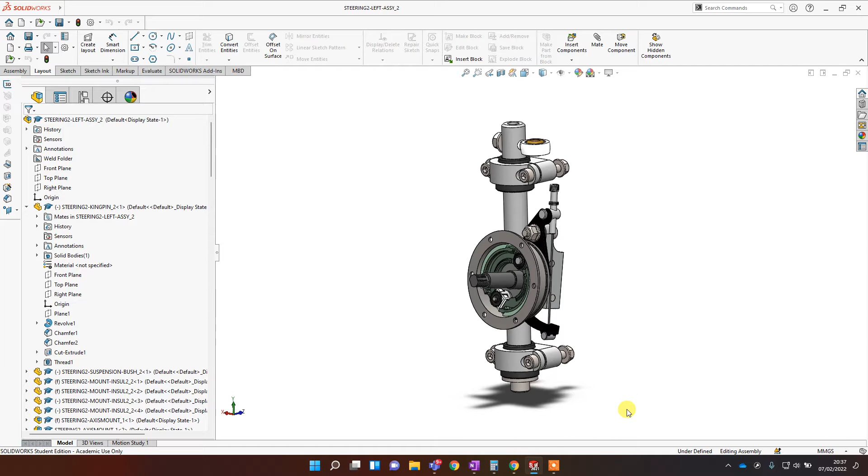The first job is to colour all the parts of your model so that they look realistic and show different materials. Here's one I did earlier - this is part of the steering for one of the race cars we're developing at school. Obviously this one's done, so I'm going to do this in reverse to show you how to do it from start to finish.

It won't take too long. This first bit I'm going to show you is quite a good technique if you've coloured some parts and no matter what you do, you can't seem to change the colour of them. It's a quick way to kind of reset, if you like.

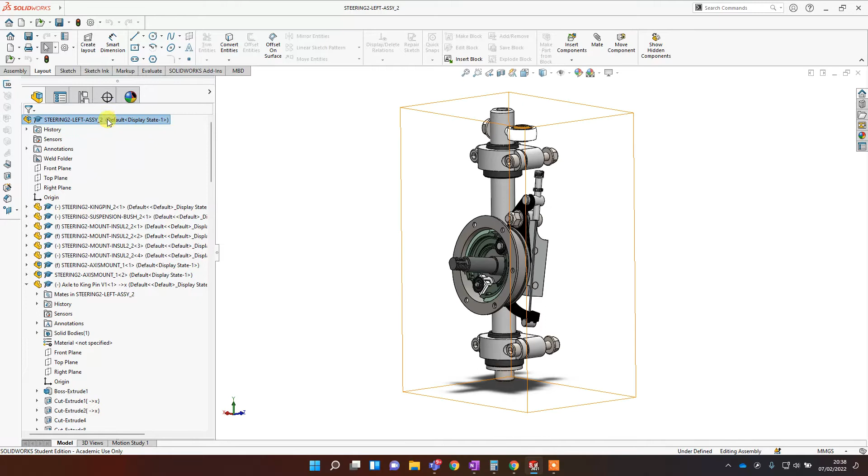This will all assume you're in assembly mode rather than working on one part. Go right up to the top of your browser tree on the left, right click on the steering assembly, right click on your main assembly, whatever it's called, and under here you've got remove all component appearances or remove all appearances.

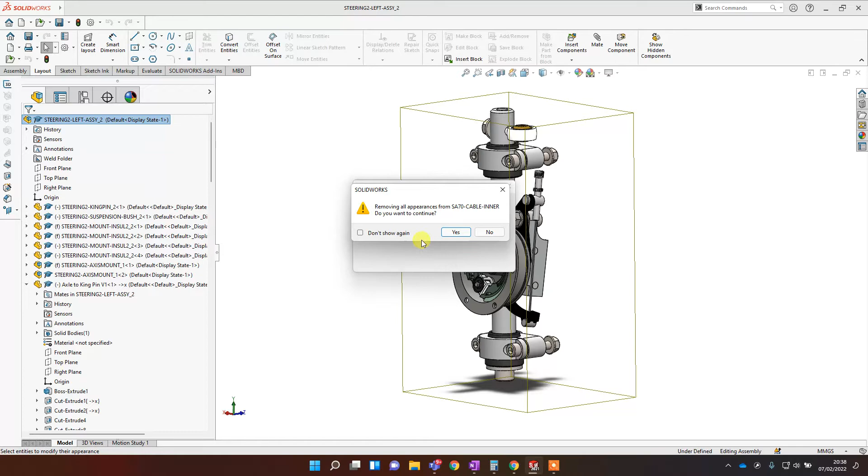If you click remove all appearances, you might get a few error messages. There we go - that'll completely remove everything and it'll just go back to being a dull plain grey colour.

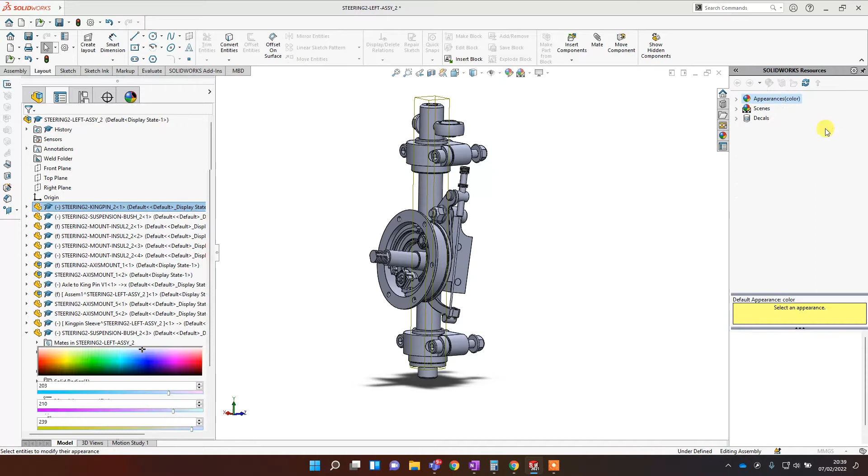If you want to colour a whole part, the easiest way I've found is to find it in the browser. For instance, if I wanted to colour this kingpin part, select it, right click on it, click on this thing here, and then choose just the top option.

Give it a few seconds and over on the right your colours and texture menu will appear. If you just want a basic colour, you can just click here. If you want something that looks a bit better, choose texture on the right, and you can go into the different appearances - say maybe metal, steel, polished steel, brushed steel, gold for instance - and get a slightly more realistic material.

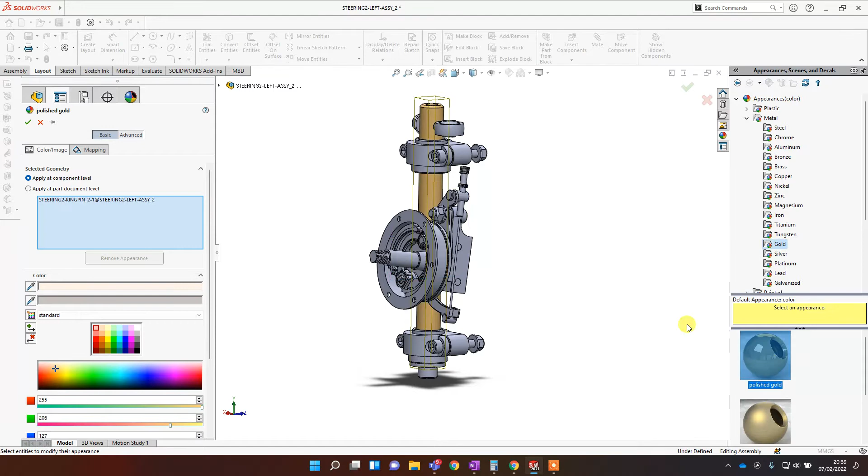On your school computers it will probably look better than this because you've got the option of turning on RealView graphics under this menu. I don't have that on my Surface because it's not got a dedicated graphics card, so it won't let me view it. But if you turn on RealView graphics, trust me that gold will look properly gold and silver will look properly silver and so on.

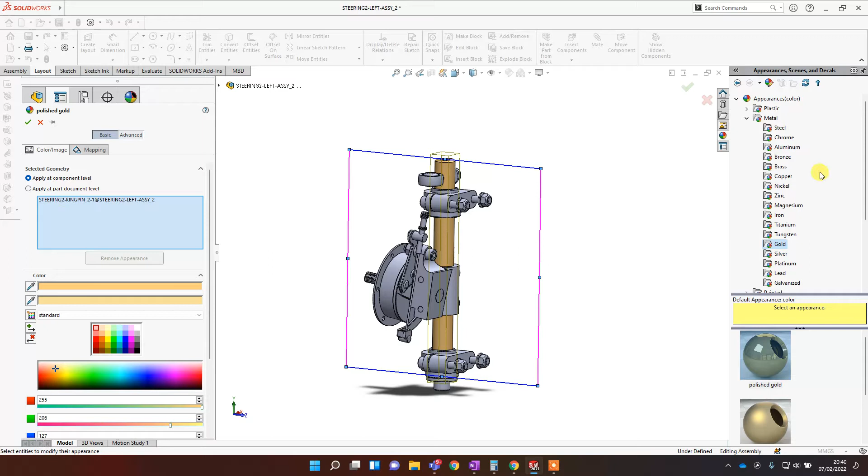Anyway, so that will change the colour of a whole part. I'm just going to leave it as polished brass for now. Click the tick when you're happy.

If you want to change the colour of a group of parts, it's quite easy - you can select them together. Say for instance I wanted all of these bolts, I can see I've got several of them here, look, 1, 2 - you can hold Control on your keyboard. And you can choose it this way, so same thing.

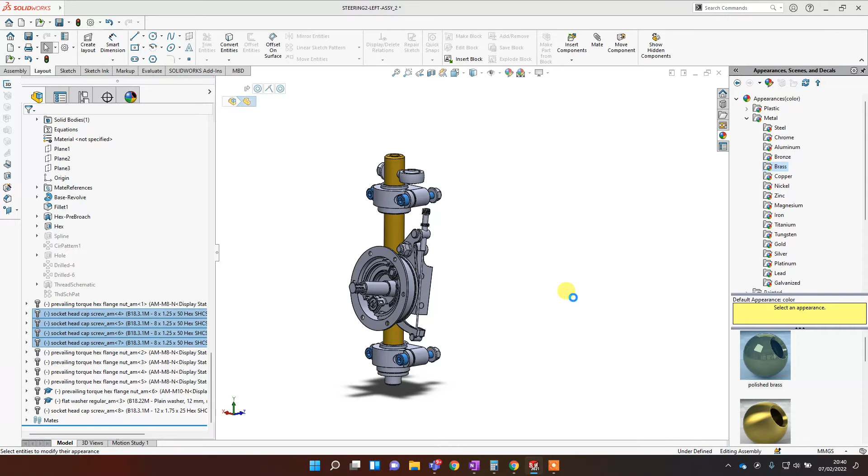In this case I just want all my bolts to be blue. I don't know, this looks awful, I know, but you get the idea.

What you can also do, I believe, is right click on a part and you've got this copy appearance option, then click on another part, right click, and you've got paste appearance. There we go - so if you've got... I didn't quite do it, paste appearance. There we go, all right.

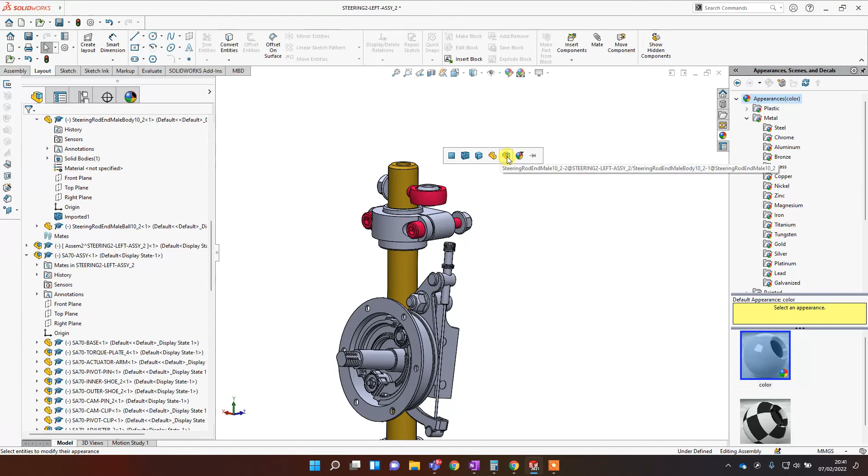Oh yeah, it's asking do you want to do it just on the face, the body, or the whole thing? So obviously here I'm going to do it to the whole steering rod assembly. There we go, okay, so you've got to watch out for that little menu. That's quite a nice little tip there.

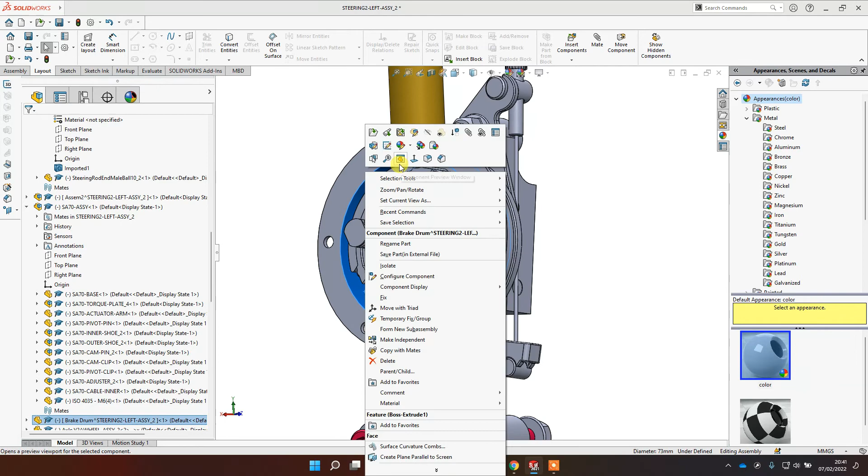You can colour just one part of an object as well. So say I wanted the inside of my brake drum here to be a particular colour, you can select just that face, right click, go to here, and here you want to make sure you choose the face, okay? And there we go.

Same method, you can change the colour of that part individually. You've got all sorts of sliders here, or you can go and put a texture on it by clicking down here first, and get a sneak preview of what it might look like with a texture.

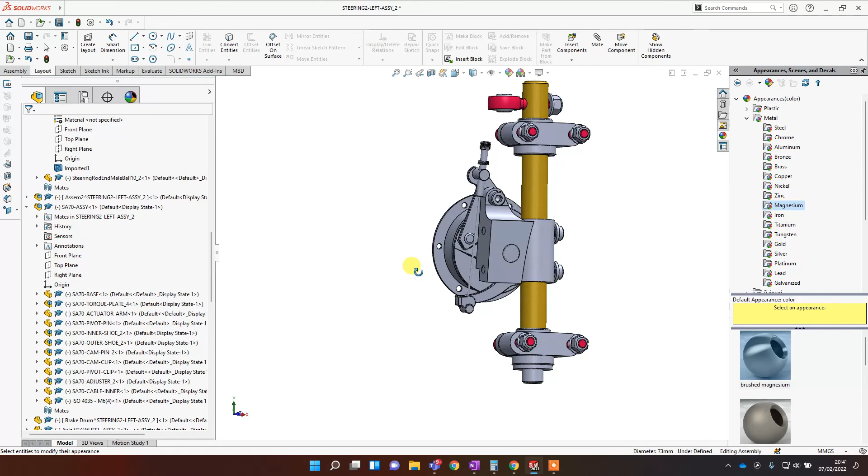So that is how to apply colours. The first job, before you move on to the next video, is get everything coloured to look realistic and authentic. Colour is not just about making stuff look pretty, it's actually a vital communication tool, because when things are coloured you can tell that they're different components, that they're separate pieces.

You can get a sense of what material they might be made from. Colouring a drawing, like doing it on paper, communicates a lot. So step 1, colour your object, make it look good, and then come back and watch part 2 and 3 for how to get decent views in 3D with cross-section and with exploded diagrams.